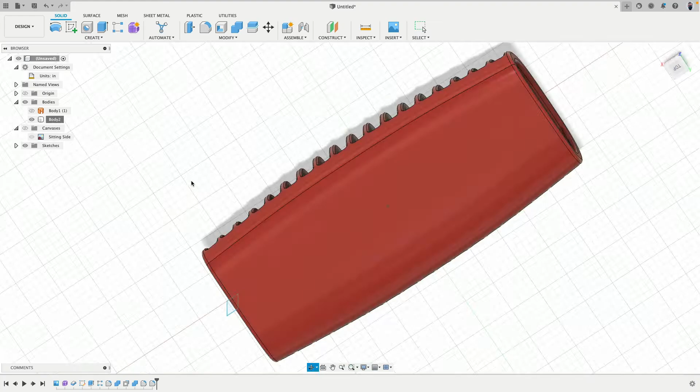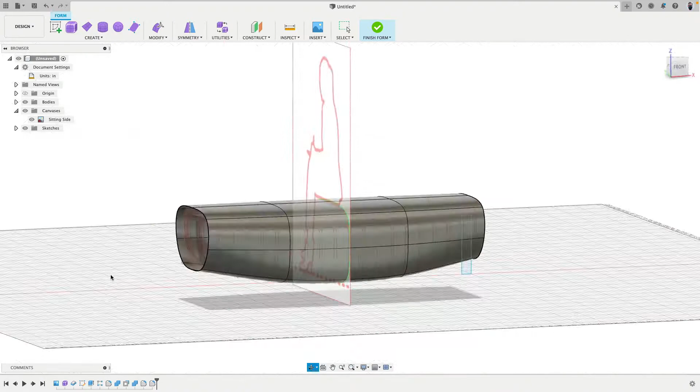In this quick exercise, I'm going to show you how easy it is to build a rather complex looking organic bench like this using T-splines and the parametric modeling, the timeline in Fusion 360. So here we have an image which we will bring in. Then there we have a T-spline shell which we will sculpt. And then step by step, we will add a thickness to the shell. There we are.

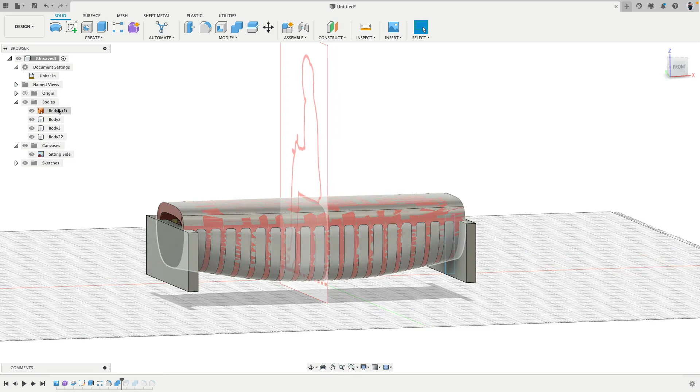Add more details, ribs, make an array, round the array, remove the array from this body, which I'm going to remove. Add more elements, modify them, cut, and then we will round the edges. Very good. And then I will show how to export everything and also how we can do a very basic scene rendering right inside this program.

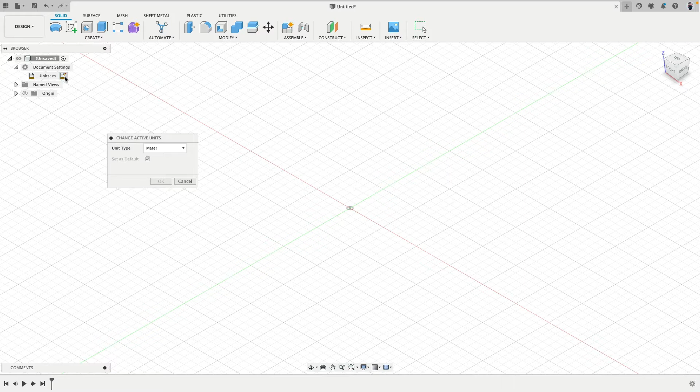Okay, let's do it. Before we get started, let's set up our design to be interactive. So I'll right click on the root and say capture design history. Now here we have the history. Then left click onto the unit system, and then we go to inches. There we are. Let's go to a side view.

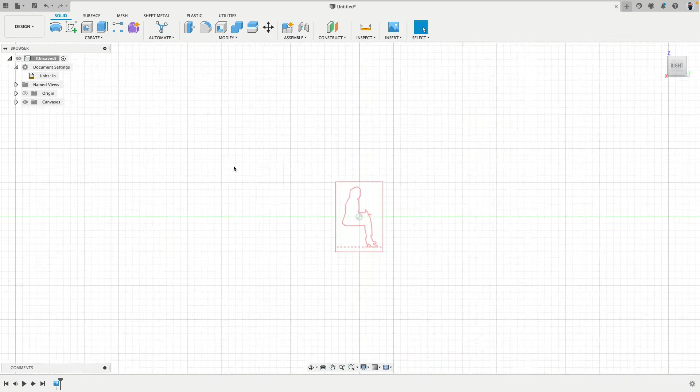Canvas, insert. Here's my image. This image I have downloaded. The link to this is in the description of this video. Click open. Click on this plane. Okay, there we are. Open the folder, right click, calibrate. Kind of like between there and there, along the z-axis plus minus, that should be 16 inches.

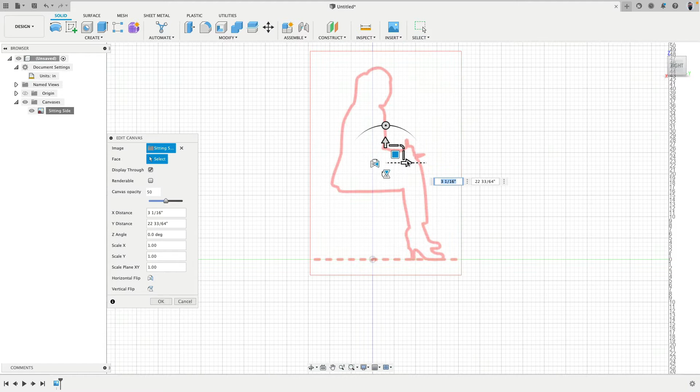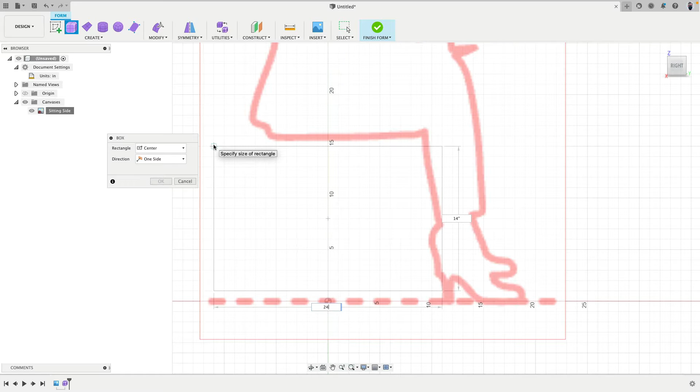Then we can zoom out, right click, edit canvas, and move this one up there. And we can try to not necessarily center her, but move her a little bit to the right side. Okay, very good. Now let's go to create form, and we will create a box on this plane. Somewhere on this green axis, I click and drag something out. So this can be 24 inches, tab 14 inches, for example. Very good. Yep, this looks good. So I can see with 24 inches width, I have enough surface to sit on.

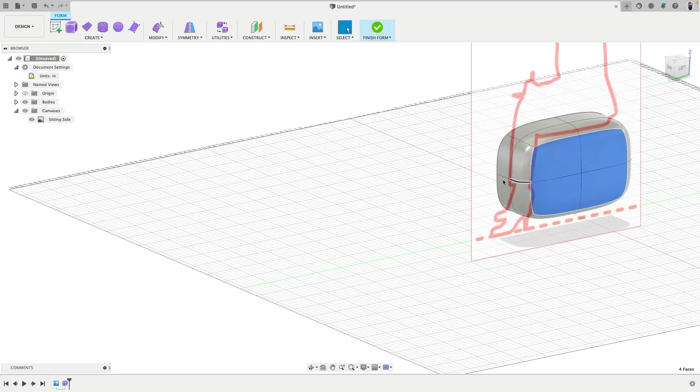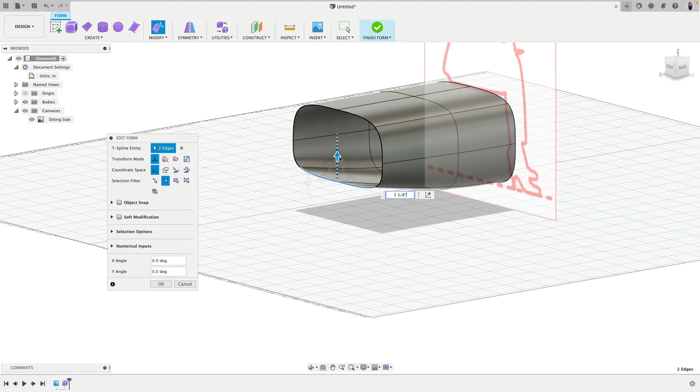Click OK. Now select the front faces, press delete. Rotate, select the back faces and press delete. Then I can double click this set of edges, go to edit form, move this out a little bit. Double click, move this out a little bit. Very good. Now what I can do is I will select the lower two edges and, for example, move them up just a notch, like this. Click OK. Very nice. Maybe double click, modify. I'm going to scale this in just a little bit, like this.

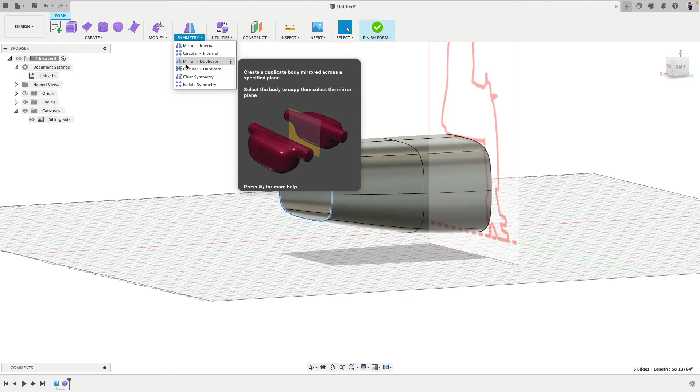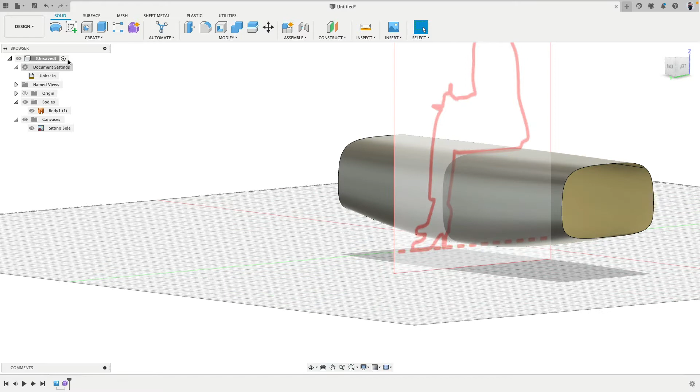Good. I would like to have a symmetry. So go to symmetry, mirror duplicate this one along this yellow plane there. Okay, finish form, done. So now we have actually a new body. And if you notice, the timeline down here captures actually what we do. Here's a marker. I can click and drag it backwards and forwards. Let's go to solid, create, thicken. This shell I would like to be 2 inches to the inside. This is good. On top, that looks nice. Down here, this doesn't look as nice.

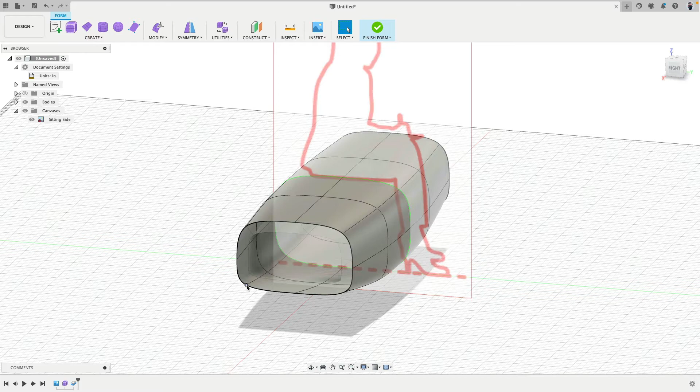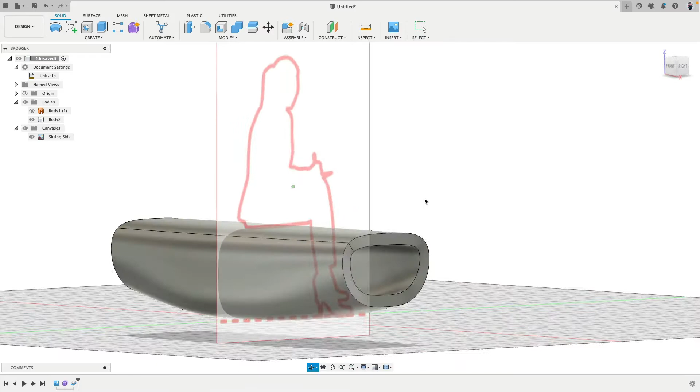So right click onto edit form. I'm going to modify everything a little bit more. These 2 points, for example, I would like to go in more. So I can go edit form, select these points, scale there. Make this a little bit more organic. Okay, finish form. Yeah, this looks actually much more refined, nicer. Cool. So you see, this is actually very interactive.

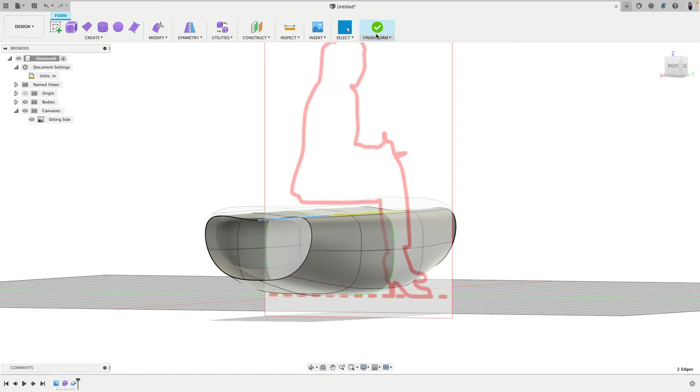So if I select these edges, just for giggles, and push this down, we can see the ghost image of the previous model. Click OK, click Finish, and then it updates it for us. And I click Undo, and Undo, and yeah, Finish Form, and we're back at the previous stage.

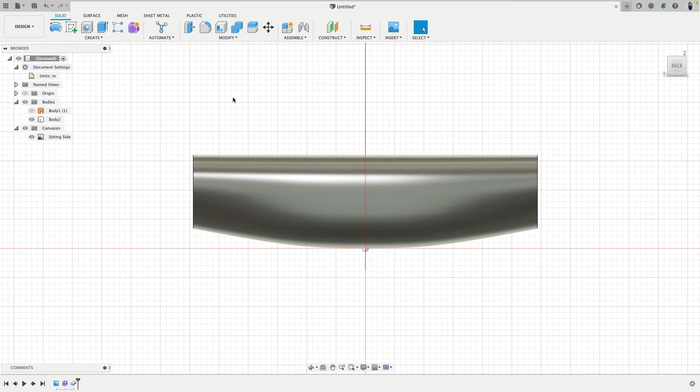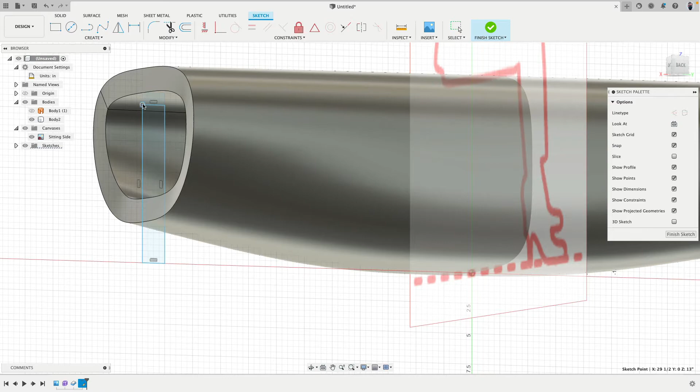So that's actually kind of like a quick introduction to what parametric modeling is. It's very structured. I start and then I continue working, and I can always go forward and backwards and edit elements. So let's continue. I will create here a sketch. There. Rectangle, and somewhere here and there I will create a 2-inch wide rectangle. A little bit under this part. There we are.

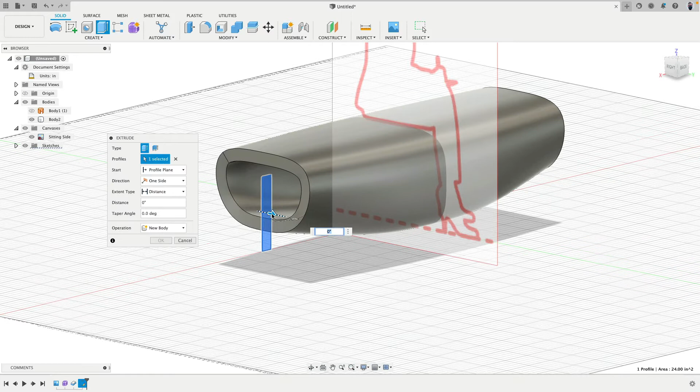Very good. I can select this line, D 2 inches. Thank you. I can select this line with D 12 inches. Very good. Finish sketch. Let's go to extrude. I can extrude this out each way, left and right, symmetry, but I would like this as a new body first. Very good. And you will see why new body in a moment.

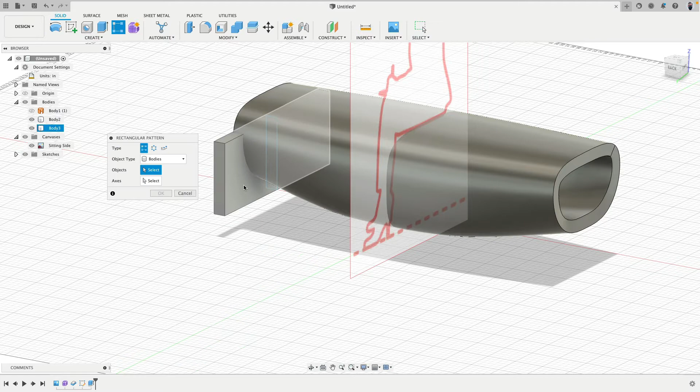I would like to have more of these cuts in a repetitive pattern. So, rectangular pattern of this body along this direction. I can move this one out, and now I should pay attention really closely to how this snaps to the grid. So you see there's a small cube.

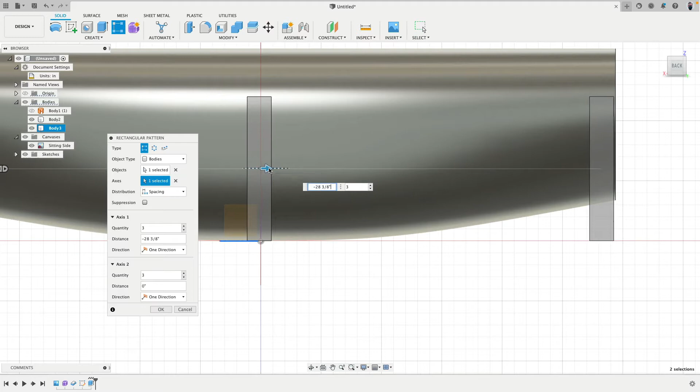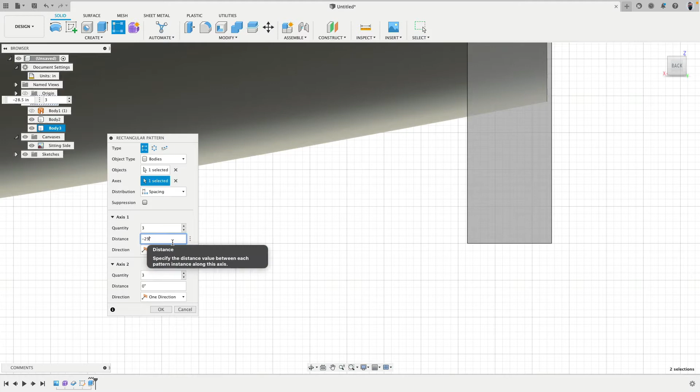So this might be, let's see, 28.5. Or actually, we need to see what the distance is. What's about 29 inches? Let's go with 28 inches for the moment first. Okay, so that's a good value exercise.

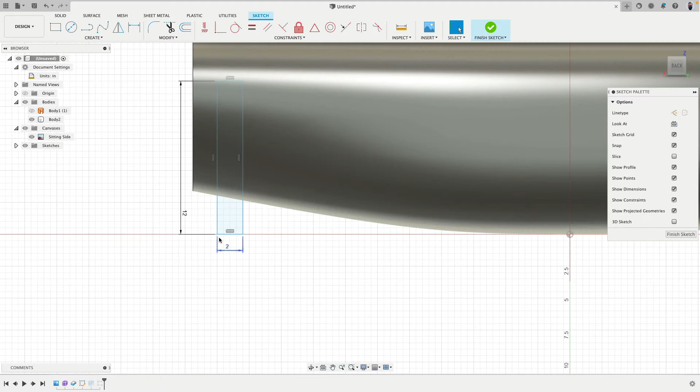Let me go back to here. I go to this sketch. So I can now, for example, move this whole thing simply to this grid. You see this is a bigger grid line. This is easier to possibly work with. There. Okay, nice. Finish sketch. And there, now see here, this is the grid line. That's the one I want. Right click, edit feature, bring this over.

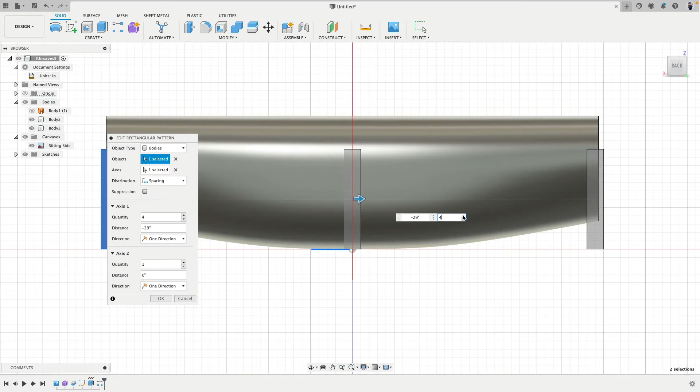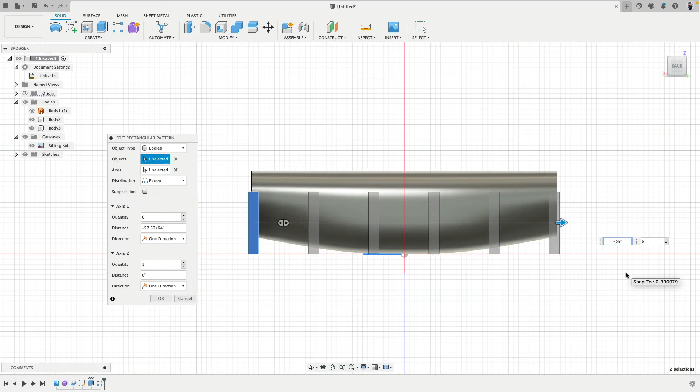Yeah, 29 inches. Okay, then let's actually start adding more points. Spacing, I have actually activated. I want to have extent to 29 inches. So I have to adjust the value here. So you see 29 divided, multiplied by 2 is 58 there. And then I can add more points. Easy peasy.

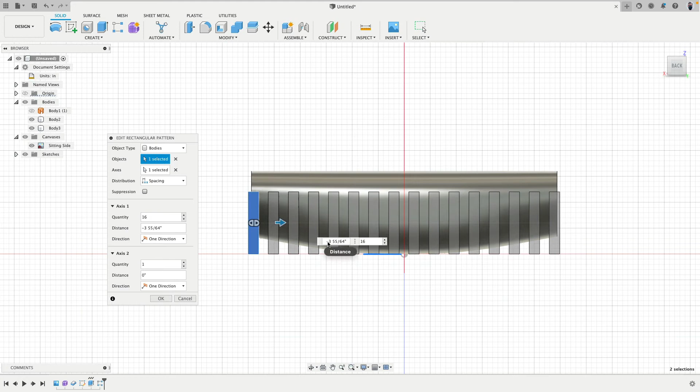So I have like from here to there, 58 of a distance, and I put 16 pieces in between. I can, of course, also simply say spacing, have just -3 inches. So there's always 1 inch of a gap, 2 inches for the piece. We want to see how can I fill this thing. The reason why I went with extent is simply now I can use the grid. See this correctly, 28. So left and right is perfect, and then I can fill evenly the space in between. Click OK.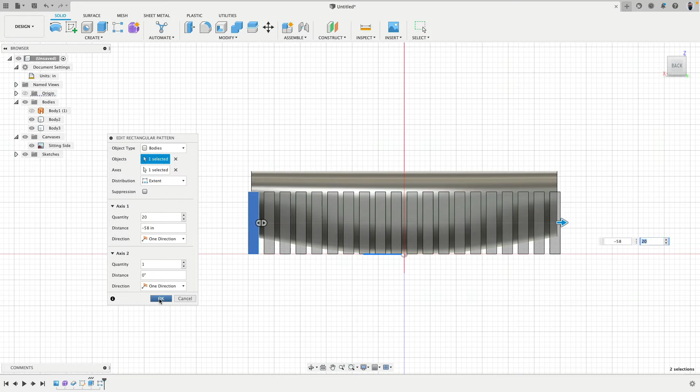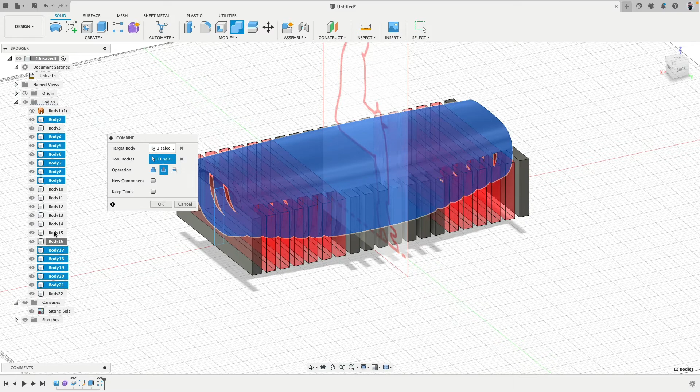Very good. Now I click combine and say U minus U, Alt Shift, and I select all these extra cubes, or maybe till there. With Shift, I can select those also in the browser, as you can see. Do not keep tools. I want them to be removed.

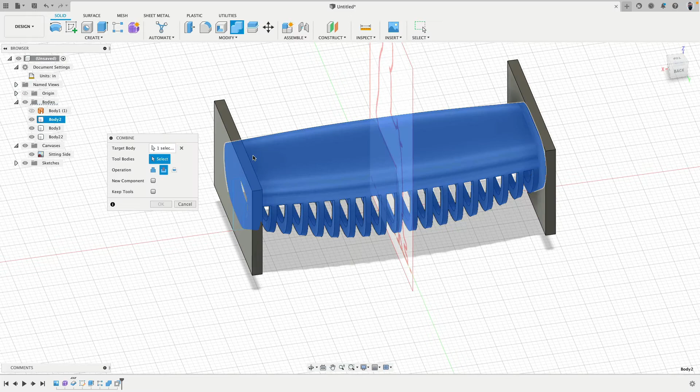Very good. Now, these two pieces here, I would like to grow up. So push pull, go up. So they're bigger. And then I do another combine and say you minus this one and this one. Then now I have a nice clean look. You see that? Much better.

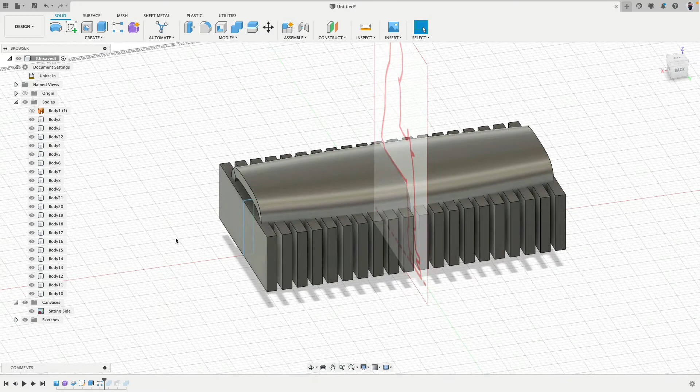The inside I would like to round. So I can go with my timeline marker back. There we are. And then maybe this one I hide. This one I hide. And this one I hide. This canvas anyway. Then I go to this view.

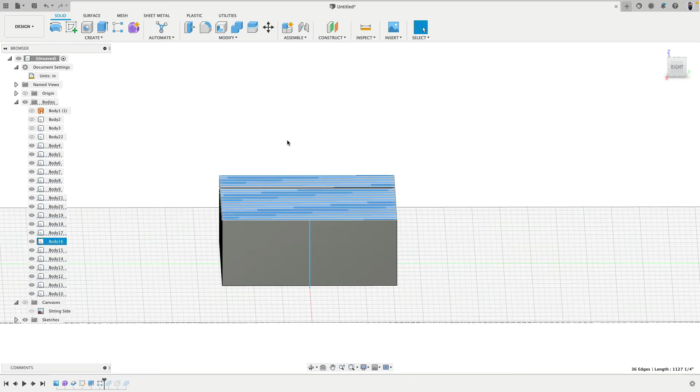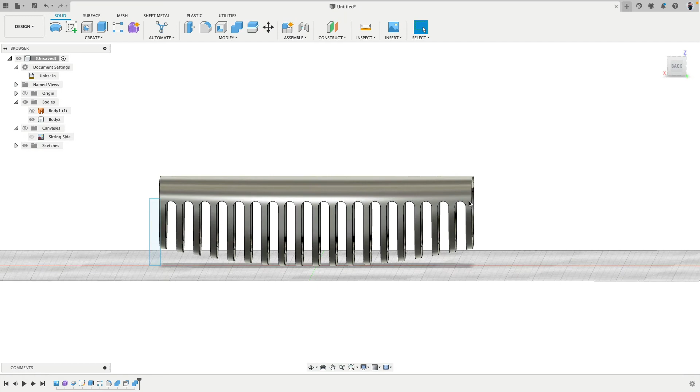Select only body edges. Left mouse button click. Drag to the left. You see then all these edges are selected. I give this a rounding of 1 inch. Enter. And then when I show all this again and scroll forward, you see how it updates it for me. Isn't that amazing? Maybe these arcs are now too aggressive. I could right click onto the fillet, edit feature, and say, well, what about 1/2 inch?

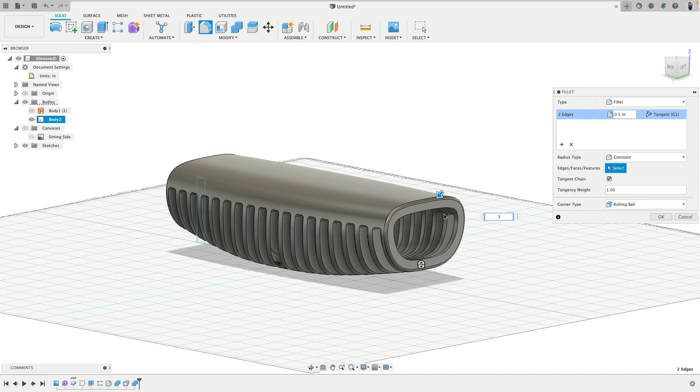Yeah, now this looks better. This and this edge we can round 1 inch. Let's see. This is too big. 0.5. This is good. Then holding on a Mac the command key, and I think on a PC it's a control key, I can add these edges to it.

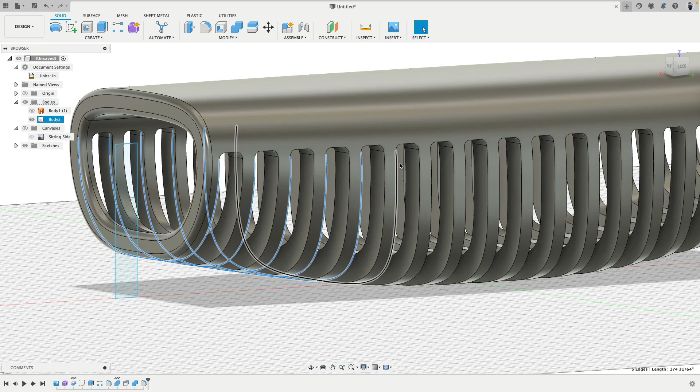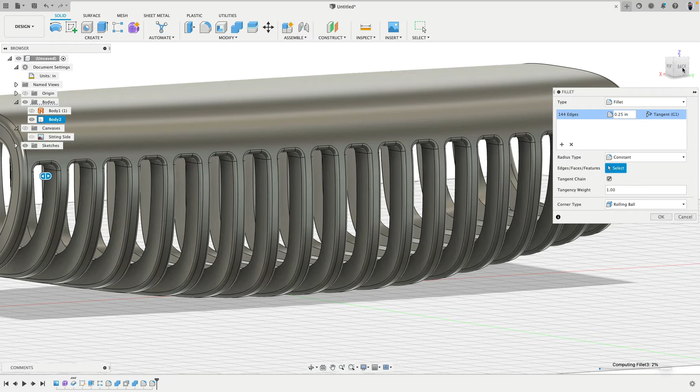So now the inside is being rounded too. Beautiful. And then I could, from each cut here, select one edge. I don't have to select all edges. And this is more like a finishing step. I do a fillet, 0.25, 1/4 inch. Yeah, this looks good. Nice and soft, not too hard. And we can click OK. Might take a moment to calculate.

And beautiful. We actually modeled a kind of organic looking bench with a straight top. The bottom part goes up, so it might actually swivel a little bit. Let's add the material to it.

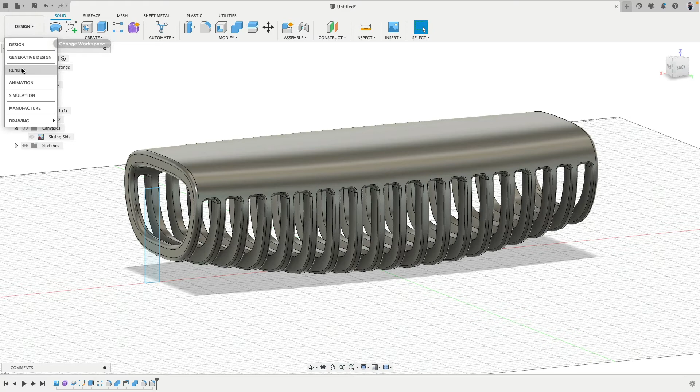We can go to render. Now this is actually black. Let's go to appearances. Then we scroll down to plastic and opaque. Actually here, this red glossy, this is beautiful. Very good. Close it. Let's go to scene setup, environment. We have, for example, here an interesting set of environments or snowfield. Let's make this in a snowfield. Very good.

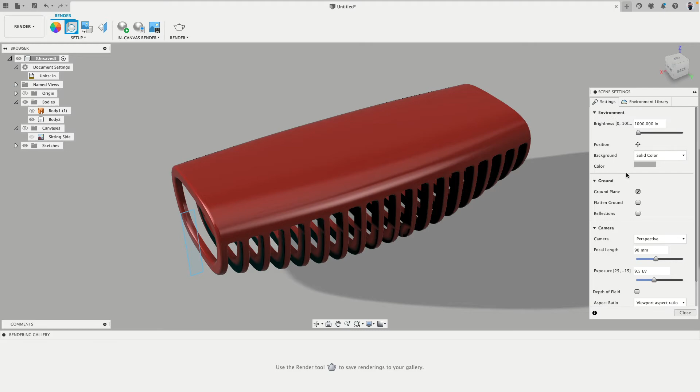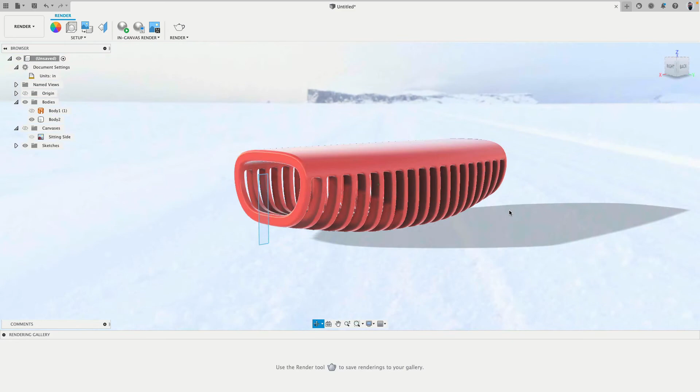Background set to environment. Looks like the snowfield isn't being used yet, so double click. Now we have the snowfield. Very nice, very good. Now we can adjust our view, zoom out and in with the mouse wheel a little bit, and hit in-canvas render.

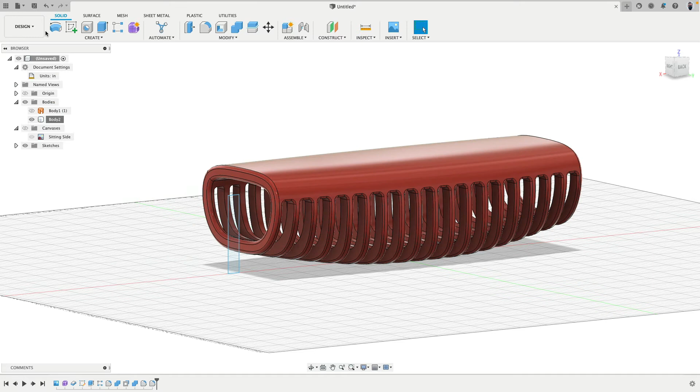Now we're creating a rendering of this piece inside this environment. The whole purpose of this exercise was to introduce you to parametric modeling, and now we can create a quick rendering of this product. When the design is done, we can go to File, Export, or right click and Save as Mesh, OBJ format, for bringing this into a program like Blender. Or we export and give it a name for SketchUp, saving it to the desktop, so we can load this into SketchUp.

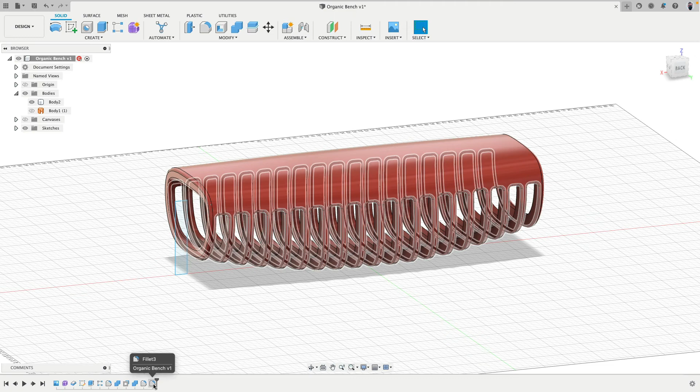To bring this to an end, I'd like to go back and talk about the timeline one more time. The parametric modeling demonstration showed you the great potential because it's very interactive. The downside, however, is it's also very strict. I have step 1, step 2, step 3 - it has to go in a particular order. So if I want to round these edges, I can't just delete the feature that does this cut, because then the software will tell me the rest of these commands don't really work anymore.

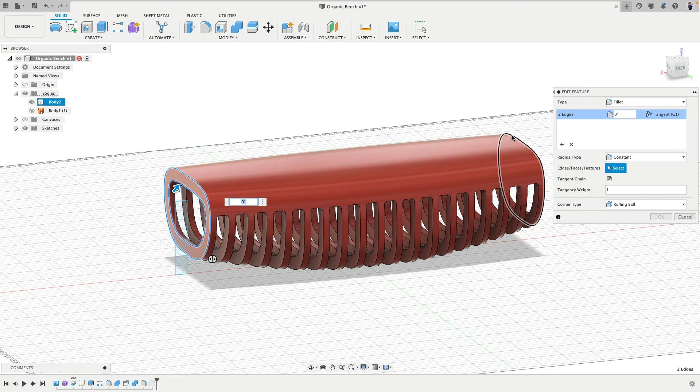Sometimes these features can also be orange or red. Red means it's broken - best is right click, delete, rebuild. If it's orange, something got lost. So for example, if I right click, edit feature, and these edges are gone, I can reassociate - that's the term for it - these edges, and click OK.

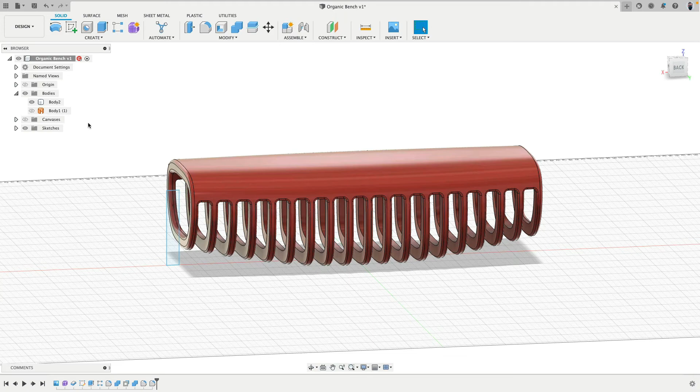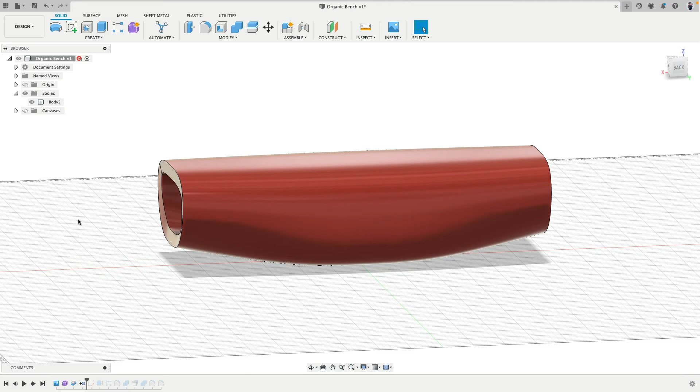The filleting, you will see, takes a moment to process, which is why I do this type of filleting always at the end of a timeline - that's a general rule. Also here we still have this surface, which I created after the thicken command. So only after the thicken command does it make sense to remove that surface - not delete, because then it's gone. Just remove. If you click delete, out of the whole design, the object will be removed. And then when I go back, there we are. Cool.

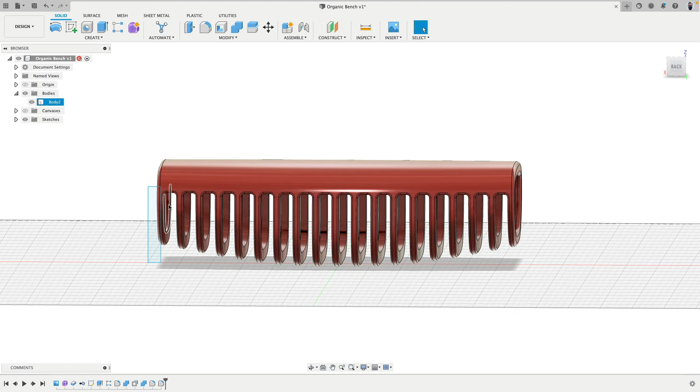Okay, there's obviously a lot more to the timeline. YouTube is also full of other great videos, but this is a good compact introduction into what it means to work with the timeline, because literally everything I can now adjust - the shape of the T-spline body, the distance of these gaps. Maybe to fix this, I could right click and say this is actually too tiny.

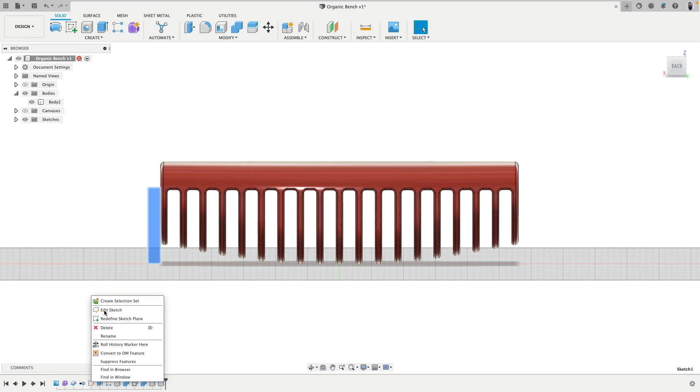So maybe I do the following. When this is the cut, the amount of cuts is good, but I will change this to 1 inch. And you see now the design looks a little bit different.

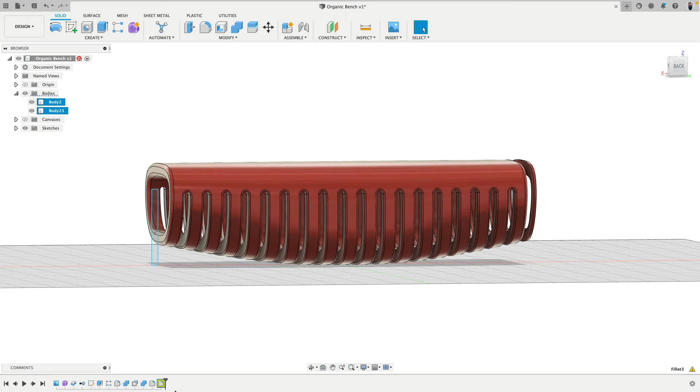Oh look at this, now here a fillet is actually broken. So this is good, this happened - I was just adjusting the design. This, for example, feels maybe more solid. So if I go with my time marker in front, there we are.

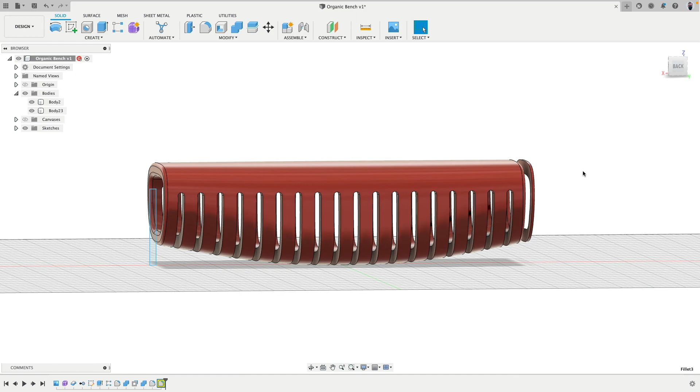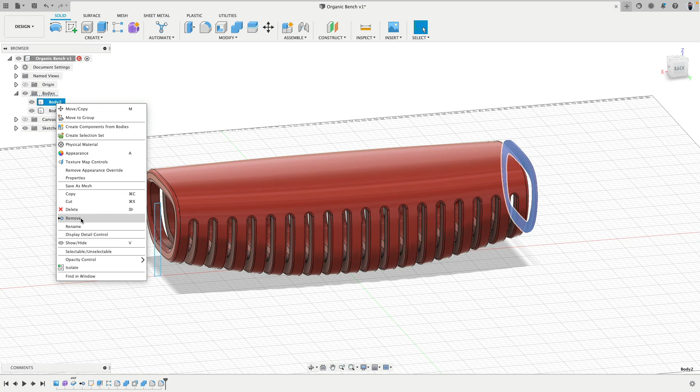This fillet was supposed to round what? I'm going to right click, edit. So it rounds all of these tiny elements there. Okay, I have here one piece that is extra. You see now this issue is gone. And this piece, I can right click and say remove there. Okay, very good, no, I didn't really adjust or perfect here.

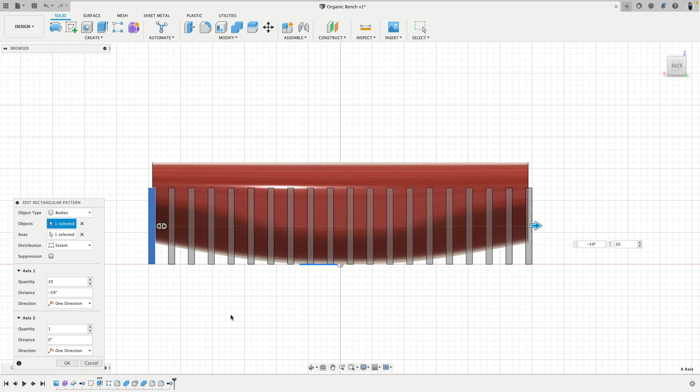This part, edit rectangular pattern. So I see this starts here and then it ends there. So maybe this I have to bring over to there to make this really accurate. So looks like 59 inches there. Very good. The timeline here will complain in a moment - it's okay, now it's rebuilding everything.

And oh, where's everything? Well, I have a remove command, and it probably just removed the whole body. So this command got slightly confused, so I right click and say delete it. And then there, I corrected my design, make it look more stronger.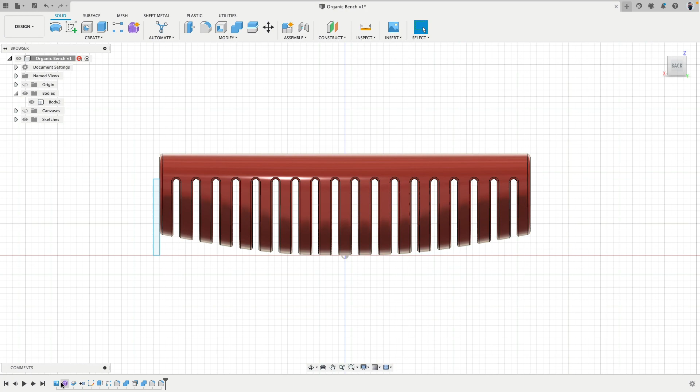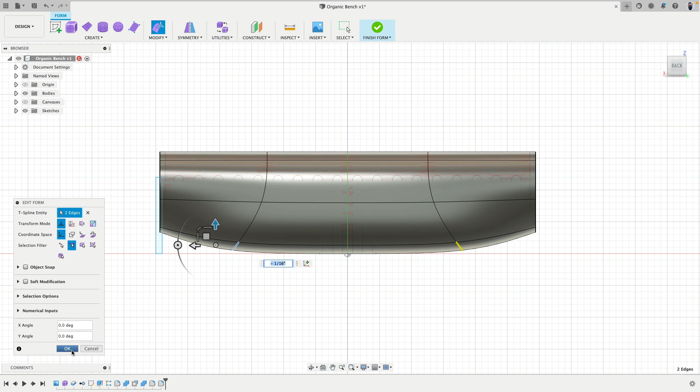Also here, everything goes straight up really fast. If I go to edit, maybe these edges, I will simply move over a little bit. You see how the bottom part I'm stretching slightly. And I could click OK, and then the whole design will be adjusted.

I'm not going to do this because I would have to recalculate everything, but I hope that at this point you start understanding what this timeline is about. It is simply collecting a sequence of steps. Sometimes it breaks, and then we simply have to figure out how to repair it. This understanding comes with time and practice. That's it.